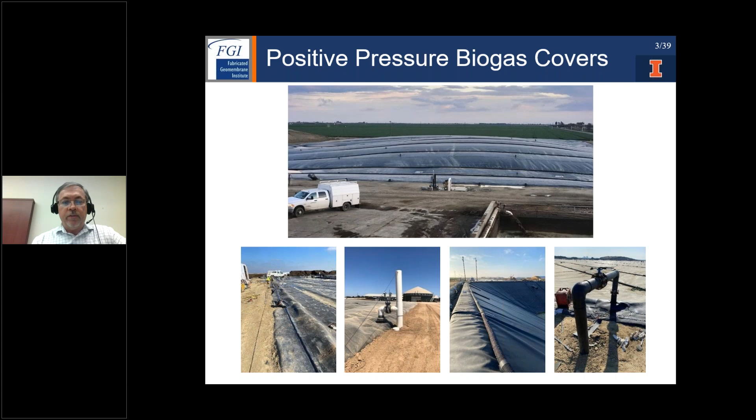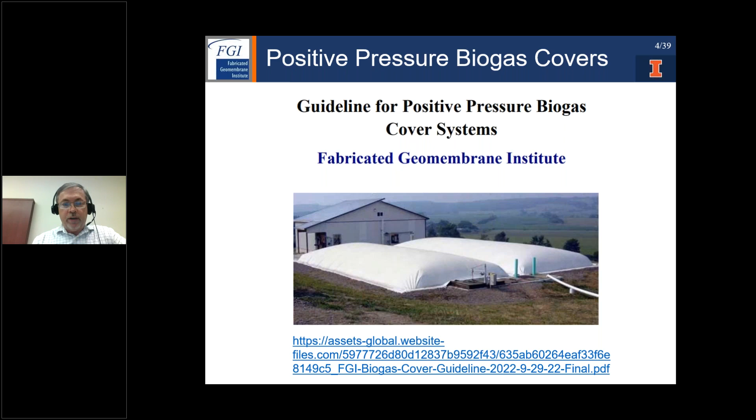Okay, well, thank you, Tim. It's a pleasure to be here today. And as mentioned, we'll be doing a presentation on positive pressure biogas covers. We'll look at the materials, the design components, and the various appurtenances and apparatus that go along with these cover systems. As mentioned, the FGI recently wrote a guideline for positive pressure biogas systems, which this webinar is based on. And this is available on the FGI website and the link below.

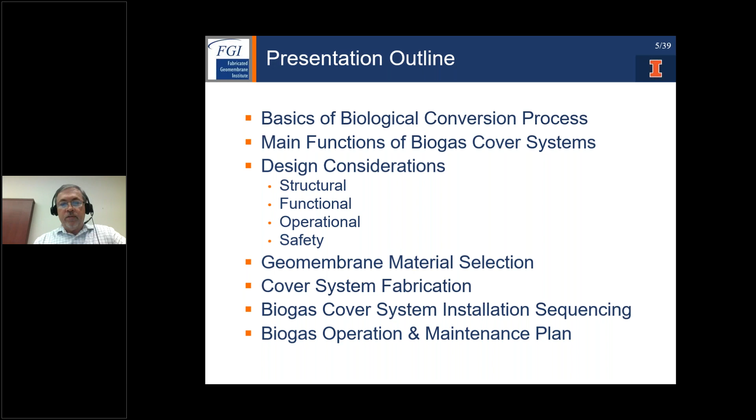So the presentation outline will cover the basics of a biological conversion process, although our expertise is not on the chemistry side, but on the geosynthetic side. And we'll look at the main functions of a biogas cover system. Steve is going to cover the design considerations, including structural, functional, operational, and safety. And then I'll cover the geomembrane material selection and testing, as well as the cover fabrication. And then we'll look at the biogas cover system installation sequencing, followed by the importance of an operation and maintenance plan for these digester covers.

So in terms of the biological conversion process, as most of us know, anaerobic digestion is the process in which microorganisms break down organic matter in the absence of oxygen, and anaerobic digestion converts organic materials to biogas. So these biogases are typically higher percentages of methane, normally 50 to 75%, followed by carbon dioxide. They can be 25 to 50%, and then smaller components of nitrogen, hydrogen, and hydrogen sulfide.

In the lagoon treatment process, we normally see most of the solids, up to 90%, separated from the liquids. These biogases generated from that point are often used for electricity, heating, generating combustible motors and gas turbines.

Often further downstream, we have additional biogas upgraders, which will further remove the carbon dioxide and the H2S, as well as some water. From there, we are producing what we refer to as biofuels or biomethanes, and these are increasingly being used for fueling in transportation.

The organic matter for most of these lagoon-based digesters is the concentrated animal feeding operations, as well as the food processing industry, not just meats but vegetables, produce, nuts, etc., and some components from municipal waste.

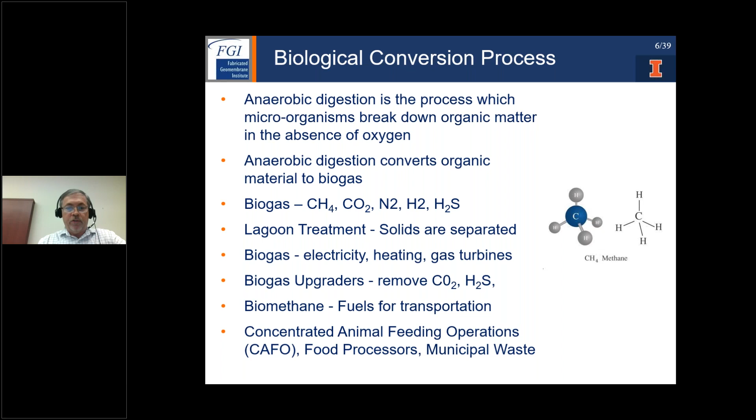So the biogas cover system, we're going to be talking about flexible geomembrane cover systems. These materials require adequate flexibility and tensile strength in combination with the ballasting and anchoring designs to withstand the internal gas pressures building up under the cover system.

Covers eliminate oxygen and enhance methane production, and this methane is collected under the cover with a perimeter gas collection pipe. Covers also help to reduce odors and the release of greenhouse gases.

The biogas covers are typically larger prefabricated panels joined on site by thermal welding, and then the whole cover system is floated into place on top of the wastewater.

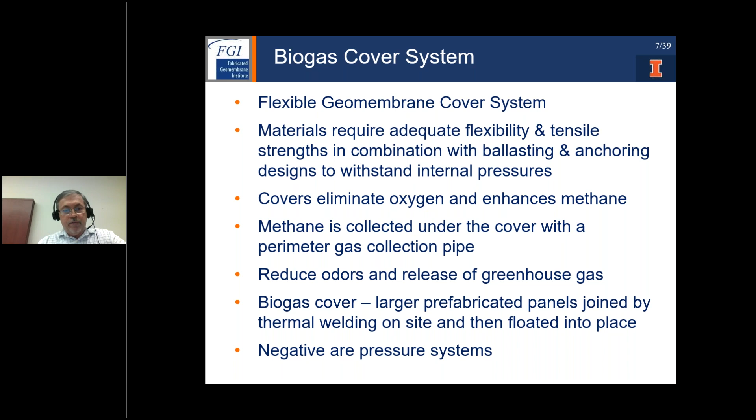And we are talking positive pressure cover systems today. We do recognize and install negative air pressure systems, which we will not be talking about.

The pictures here on the left show an example photo of the perimeter gas collection pipe and a white baffle curtain being installed. This is the actual liner system prior to the cover going on.

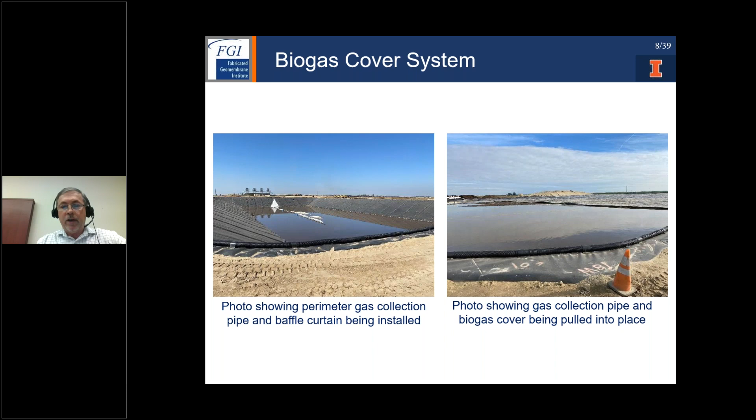Often we have baffle curtains fabricated and installed under the cover systems as serpentine paths. On the right, we're showing the gas collection pipe again, and here we see the floating biogas cover being pulled into place.

So at this point, I'm going to turn it over to Steve. Steve, you can cover the design considerations.

Thank you, Brian. So just talking a little bit about the components of a biological digester with a positive pressure cover. There are actually several more components, but we're going to focus today on the cover.

Just to mention, we normally have a base liner system to contain the liquid in the lagoon itself, and that most commonly these days would be a geomembrane, but could also be a simple clay soil liner, or in some cases these are even unlined if they're legacy systems.

We have the operational systems, which include your filling and discharge components, also your gas takeaway and venting system. And as Brian mentioned earlier, a baffle curtain is sometimes installed in order to eliminate short circuiting in the flow of liquids through the system.

A baffle curtain would typically be a flexible prefabricated geomembrane system, also with flotation on top and anchorage on the bottom. So next slide, please.

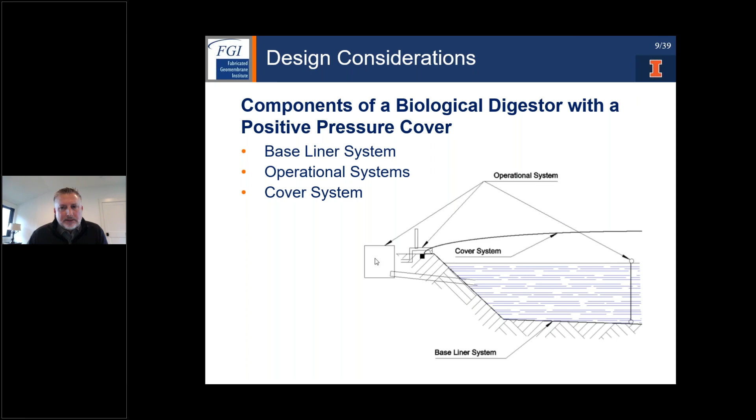Okay, so now talking about the cover system, where we're going to focus today. The primary function, Brian talked about a few others from a functional standpoint, but the primary function with regard to structure is...

...to capture the digester off gas and route it to a collection system, and of course also to prevent water infiltration and limit oxygen, things Brian already spoke about. But from a structural standpoint, that's where our main concern is.

Structural performance requirements, again, are to contain the off gas and also to resist external loads without rupture or excessive deformation of the cover system.

Design is typically proprietary in these cases and experience-based. There's not really any regulatory or industry standard for these cover systems, so you'll see a wide array of different systems out there in the field, and different performance requirements, all really established by the designer of record of the cover system.

The primary components of a cover system would include a geomembrane, perimeter anchorage, internal ballast, and then mechanical connections and penetrations connected to the cover system.

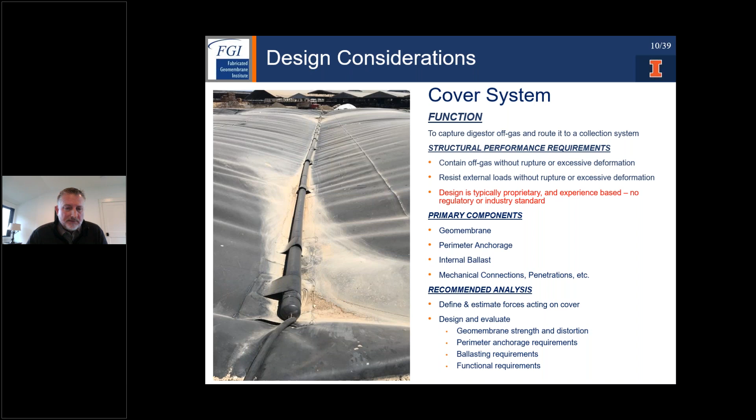Recommended analysis for the system: of course you have to define and estimate the forces acting on the cover system, and then evaluate the geomembrane strength and distortion, the perimeter anchorage requirements, ballasting requirements and ballast anchoring requirements, and then the functional requirements, meaning the seal of the system to retain that gas that it needs to.

So next slide, please, Brian. Talking about the forces: so we have dynamic and static forces, some well-defined, others not so much.

In the dynamic realm, we have the operational pressure, which is the positive pressure underneath the gas cover. This is significant, and it's typically fairly well defined in design, because the owner can specify that. The mechanical engineer involved in designing the takeaway and venting system should make sure that whatever maximum and average values are given to the designer of the cover are maintained during operation.

We also have environmental forces, including wind, water, snow, and ice. But for positive pressure covers, wind is really the only and primary concern, because it acts in the same direction as the internal forces under the cover, so we want to make sure it's an additive, destabilizing force. Water, snow, and ice landing on top actually act to stabilize the cover. We understand they're there and sometimes can take them into account, but in most cases wind is really the only and primary concern of environmental forces.

And of course you have impact and abrasion. It certainly can be significant, but it's very difficult to characterize. So in most cases impact and abrasion isn't directly analyzed or included in the analysis, but they definitely need to be accounted for, typically through material and load safety factors during the design process.

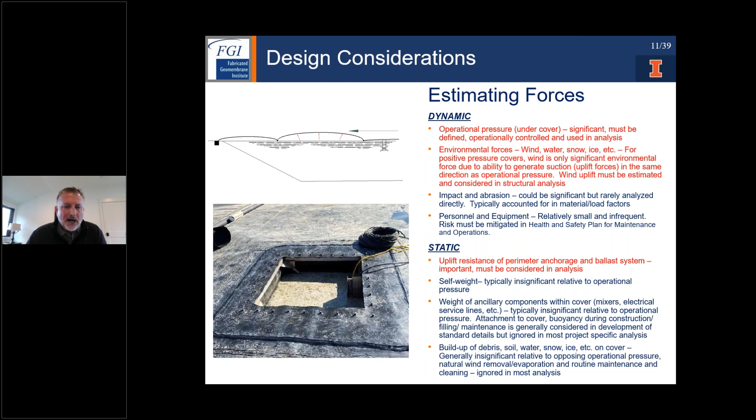And then, of course, you have the potential buildup of debris, soil, and water on top. Again, those are really more stabilizing forces, not necessarily bad for the cover - we'll talk about that in the maintenance and inspection part of this presentation. From a stability standpoint they actually add weight and form a stabilizing force, so they're not typically taken into account in analysis. They're also very difficult to characterize because you never know how much will be there.

Moving on to the forces we do need to characterize and how to estimate them. I briefly mentioned the operational pressure, typically defined by the owner or the mechanical engineer designing the takeaway system. Typical values would be right around half an inch of water column, or 0.02 pounds per square inch. It seems like a very small pressure, but it's actually about ten times the weight of the typical 80 or 60 mil geomembrane used for this type of cover system. So it's significant.

Wind uplift: again, there's no industry standard for wind uplift. The method used is really up to the designer. The first step is to determine a design wind speed, which can be defined by code, by the literature, or by the owner. Several methods are available to convert design wind speed into an uplift force. My preferred method, and probably the most commonly used in this realm, is ASCE 7, which is the standard national building code for structural loads. But you have to apply appropriate factors, since a lot of these cover systems are not located in highly populated areas.

There's a very minimal risk to humans with regard to the structural failure of a cover, so you take that into account when applying the method. You also need to modify it because ASCE 7 is really meant for buildings and things of that nature, where this is not necessarily a building but a very flexible structure. I typically would treat a cover system, a positive pressure cover system, as a dome or arched roof structure with a spring line right at the ground level, and then modify and use the ASCE 7 method from there.

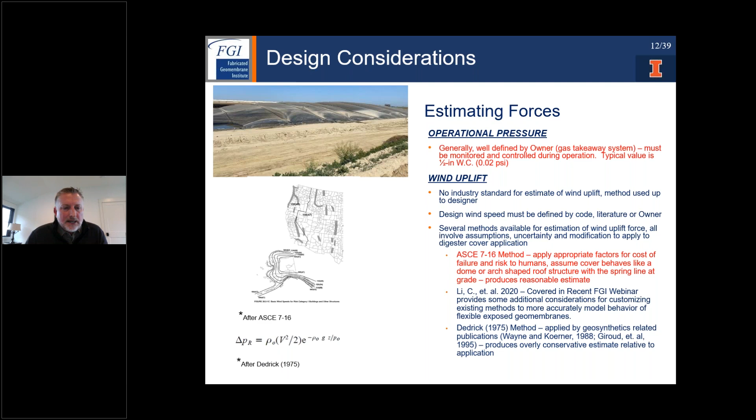We also need to estimate the uplift forces in resistance and anchorage. There are several things that provide that, but primarily the resistance to uplift is provided by the perimeter anchorage and the ballasting and ballast anchorage. We also have to look at cover self-weight, which is fairly insignificant compared to the others, but it can be taken into account as a positive and stabilizing force.

But the cover and ballast tension anchorage is much more complex and difficult to define, mainly because these geomembranes have very low modulus compared to most structural materials the structural engineer would evaluate. The stretch, along with the shape of these lagoons and the way the perimeter anchorage interacts with the ballast lines and ballast anchorage, creates a fairly complex 3D interaction and load shedding that's very difficult to model. So there's not really a standard approach there, but most people will simplify the method of estimation to a two-dimensional analysis versus three-dimensional, not considering load shedding, which makes it a fairly conservative and much simpler analysis to do.

We want to look at this because you have to determine both tension in order to determine anchorage requirements - you need to know the tension in the cover system as well as the tension in the anchored ballast system. To do that, there are really three methods primarily used here. You can look at the traditional tension cable method, which has been around for at least 100 years, looking at telecommunication cable hung from poles and things of that nature. It gives a good approximation of the stress, strain, and distortion in a unit width of geomembrane if we treat it two-dimensionally, but it doesn't explicitly take the flexibility and low modulus of the membrane into account, and therefore requires iteration to get a practical result.

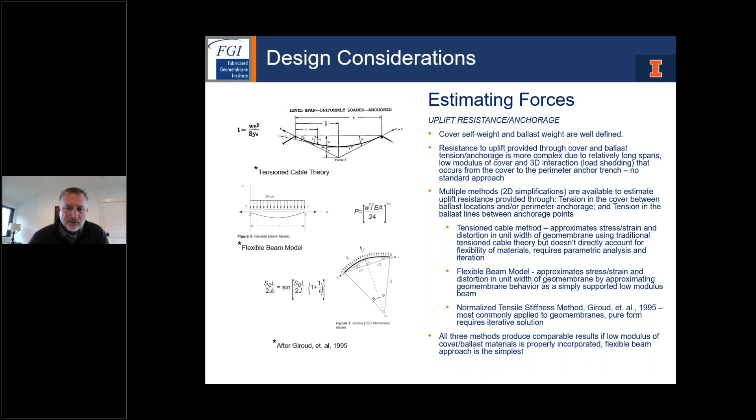Generally, the stress-strain behavior can be modeled linearly when you're below the yield point of the material, or at least in the lower strain regions, and therefore these methods all produce acceptable results and estimate tension in the geomembrane. Talking about perimeter anchorage, there are really two common methods used in this type of system.

The first would be a structural concrete ring wall. It's a very effective system, very good anchorage, but also very expensive. So it's typically confined mostly to industrial applications where they're very long term, want a long lasting cover, and aren't necessarily inclined to go a less expensive route.

It requires structural design of the wall to handle the lateral loads at the top, and also requires structural and functional seal design of the geomembrane connection to the wall. So you usually have a batten strip and gasket system along with bolts to make sure you get that seal. Other than the expense, it's a very good, very long-lasting system.

More commonly, and what you mostly see in agricultural applications, is a soil anchor trench backfilled with either soil or sometimes concrete added for weight. This system is usually designed so the liner and the cover system are both included in the same anchor trench. But the cover system produces significantly more tension due to operational pressures and wind load than the liner system, so that's where we typically have to design the trench sizing to accommodate the cover system.

Since the load due to wind is highly uncertain, best practice is to design that anchor trench to hold up to the yield strength of the geomembrane cover system, not necessarily the estimated tension in that cover system. Of course you design the system itself at a tension lower than the yield strength, but we want the anchor trench to accommodate the entire yield strength just in case there's an abnormal event. You don't want to dislodge the cover from that anchor trench, because then you risk damaging the liner system as well and having a liquid release, which would obviously not be recommended.

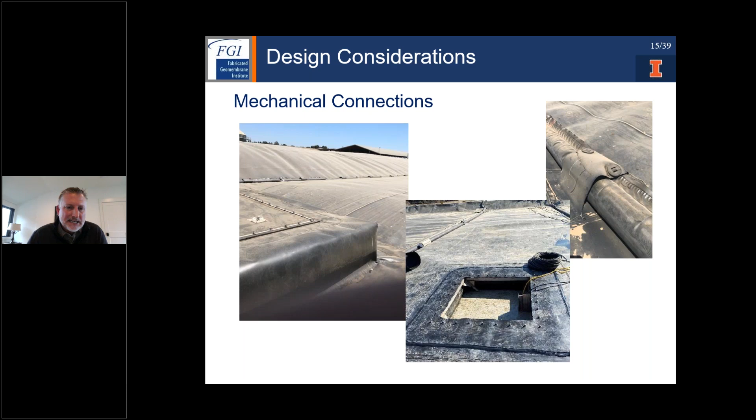Talking a little bit about mechanical connections—there are many access hatches, mixing hatches, and welds of the ballast system to the cover. You want to make sure that the tension being carried by that cover can also be carried by any mechanical connections to the cover. Otherwise, you can have an issue with localized stresses being higher in these regions around these mechanical connections, so you just want to take that into account in the analysis of the cover system.

Also, from a functional standpoint, you've got many penetrations of these cover systems, and you want to make sure the seals are adequate. For pipe-type penetrations, as the outer two photos show, simple booting systems and welding will usually do the trick, but it needs to be flexible enough. Remember, these covers are very prone to movement under wind and operational pressure, so whatever booting system is used needs to be flexible enough to accommodate that movement.

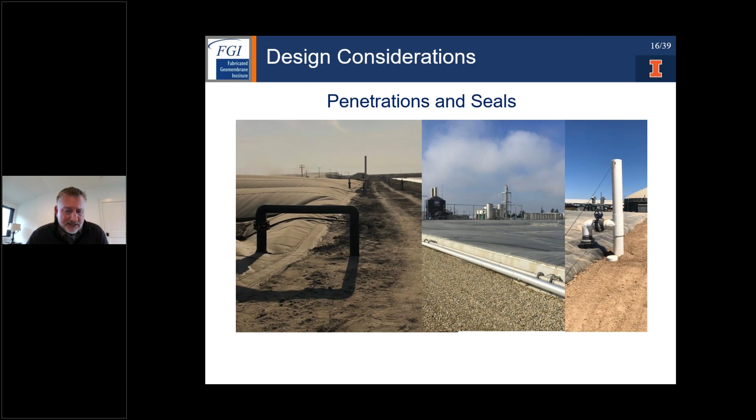And then, obviously, at the anchor trench or anchor wall, there needs to be a connection that's leak proof. The soil anchor trenches typically seal themselves with the soil, but a concrete wall will require a gasket and a batten-type seal system to make sure that you're not leaking the gas.

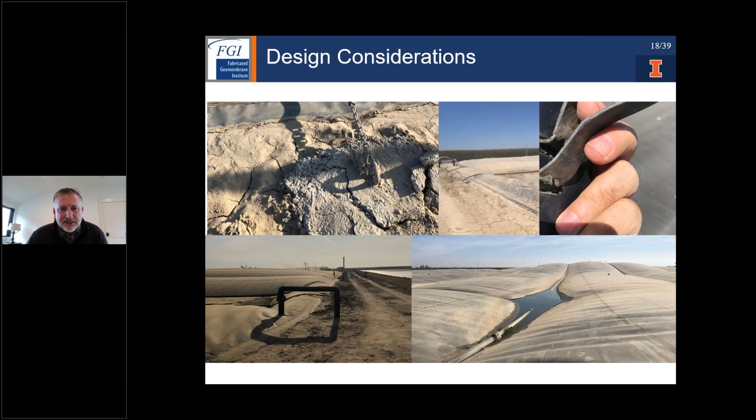Recommendations for ballasting: first, you have to take into account construction cost versus the risk and expense of failure. Grid ballasting is the better system with a concrete ring wall, but of course, not always practical. If you're doing perpendicular ballasting, you want to make sure the layout geometry is long and narrow versus square or regular—that allows you to limit the span length on the ballast line.

Create uniform cover spans where you can. That's also better to avoid horizontal stresses in the cover. Minimize the ballast line spacing to reduce cover span between the lines. And again, that reduces stress. Add internal weights if possible to add ballast and additional counteracting forces. And also allowing installation slack in those ballast anchorage lines will reduce the tension in them.

So just like any cable, the more sag in the cable, the less tension. And so you can do the same thing with the ballast lines as long as it's within the parameters that you want to allow that cover to expand.

Design the cover to temporarily carry the entire design load, even without the ballasting system. So you can reduce your factors of safety, but if you design the entire cover system to be below yield tension under the entire design load, then if your ballast lines do fail or get dislodged, it's a simple repair versus replacing the entire cover.

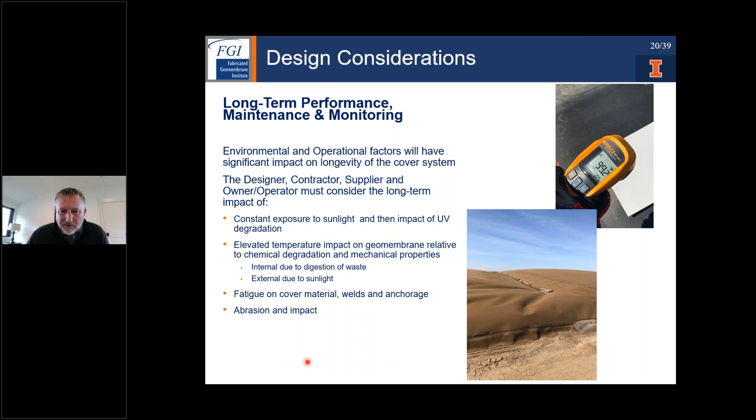We need to constantly do inspection for small fatigue cracking, things of that nature that might occur, and make sure those get repaired before they become major issues. And then finally, of course, abrasion and impact can also cause small pinholes and other things that need to be repaired before they become a big issue. Next.

Last but not least, safety is always very important. Anytime you're working around these covers, you're dealing with a huge volume of flammable gas. And so that needs to be taken into account with project-specific safety plans, training for personnel, and specific to fire prevention. Personnel working on these sites should have fire retardant clothing, use non-sparking equipment, make sure they have ground fault interrupted equipment, and certainly no smoking anywhere near any of these covers.

And then obviously need to have good fire protection or fire suppression equipment readily available to extinguish any fires before they become a major issue. So with that, I've covered all of my portion of the presentation, and I'll turn it back over to Brian to continue.

Okay, thank you, Steve. And we always appreciate your firsthand expertise. You've worked with us on a number of structural and civil designs, and have a lot of expertise.

Moving on to the geomembrane material selection, the most common materials that we're seeing in these fabricated geomembrane digesters are linear low density polyethylene. We're seeing PVC, both unsupported or unreinforced and reinforced. We're seeing reinforced polyethylenes. We've seen EPDM rubber, and we do see some HDPE being used as well, although they are quite stiff semi-crystalline materials with very low tensile yields. So we have to go very thick with those materials.

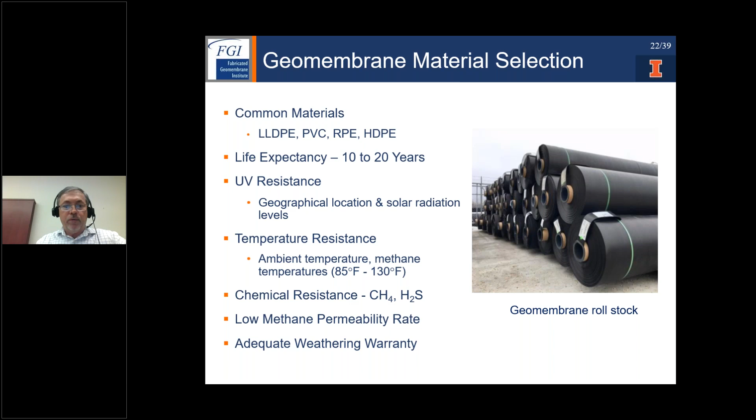And as well, you should make sure you have a membrane that has a very low permeability rate or vapor transmission rate, and that the manufacturer is providing adequate long-term weathering warranties.

So the FGI, when we wrote our guideline last year, we definitely looked at some UV testing. We looked at a once-in-lifetime formulation, geomembrane formulation test, and accelerated UV exposure for 10,000 hours, which we then inspect the surface for cracking and surface degradation, as well as we look at tensile strengths retained, and we're recommending a minimum of 80%.

We also looked at elevated temperature resistance. We looked at the oven aging testing at 85 degrees Celsius or 185 degrees Fahrenheit for 90 days. And then again, we would at that point look for any surface cracking and surface degradation, and as well looked at the retained tensile strengths of 80% minimum.

The chemical resistance, we do note again that we need good resistance to methane and resistance to hydrogen sulfide. At that point, we had not listed the test methods, but the next slide will talk about that. And finally, we do note a methane gas permeability to a maximum of 1,000 milliliters per meter squared per day. And many of our geomembranes can be well under that.

Recently, in the last year, the Geosynthetic Institute out of Philadelphia has been working on a new test method for positive pressure geomembranes, and the method established and now officially in place is method GM35, and it's using a QUV accelerated weatherometer, but in combination testing with pressure.

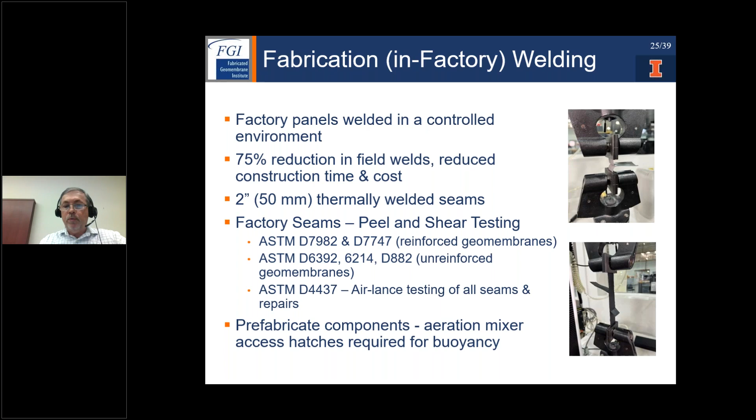We typically are using a 2-inch factory seam, similar to what we use in the field, a thermally welded seam. And all of our factory seams are tested in peel and shear in accordance with the appropriate ASTM test method, whether we're fabricating a reinforced or unreinforced material. And as well, we try to prefabricate as many of the surface cover components as possible, including things such as the aeration mixer and access hatches, which really do require positive buoyancy, as Steve pointed out.

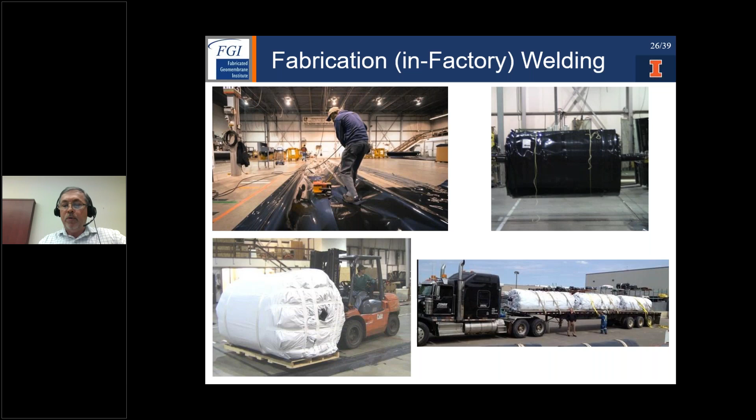The in-plant fabrication, as you can see, just a couple pictures of some of our plants, but in the picture on the top left, we're welding in ideal conditions, so room temperature, clean floors, tensiometers, inline testing with the fabrication. And then these are wound up onto larger panels. We can typically, for these digesters, make panels, depending on the material weight and thickness, anywhere between 20 and 30,000 square feet. And then these large panels, as you can see in the bottom pictures, are put on trucks and transported to site.

So in terms of the sequencing of the cover installation, we follow a couple of broad steps. First and foremost, working with prefabricated panels, we need to have an appropriate work area or laydown area on one end of the lagoon. This is where we do our staging, unrolling, welding, and deployment of the prefabricated panels. And we need a dry, well-compacted area with adequate space.

Second, we need good weather conditions. We really have to make sure we have a low wind day or a couple days when we're pulling these covers over. And of course, we don't want to see a lot of rain or moisture while we're installing these.

And then we have to fabricate a special reinforced leading edge. That's our main edge that we're pulling the cover into place over the wastewater pond. With that leading edge, we need proper pulling equipment, right-sized trucks or backhoes, and heavy-duty ropes evenly spaced across the leading edge. And from there, larger projects often require multiple fabricated panels that need to be welded together on site sequentially and then floated into place one by one or section by section.

As soon as we have the cover pulled over, the materials need to be properly adjusted, distributed properly into the anchor trench and properly backfilled. And once we have the cover system in place and backfilled, that's when we have to start the ballasting, whether we're using webbing or strapping system or the weight systems that Steve was showing.

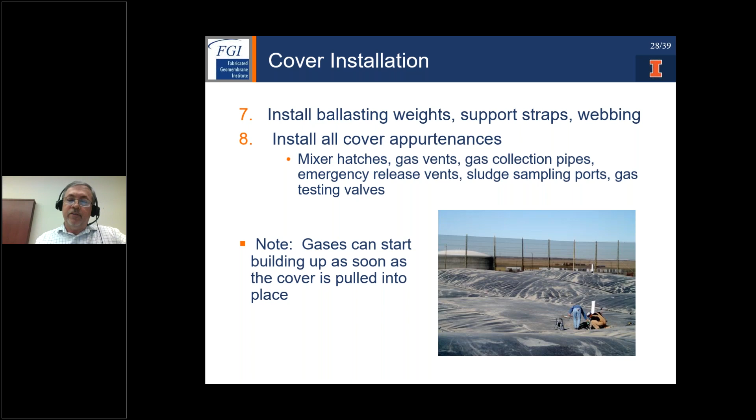And note, often, once we have the cover system backfilled and we're starting to do the ballasting and venting, we actually are already seeing gases build up, as we see on the picture on the right. We're putting in some burping vents, and in this installation we already have gases building up, so it can be challenging.

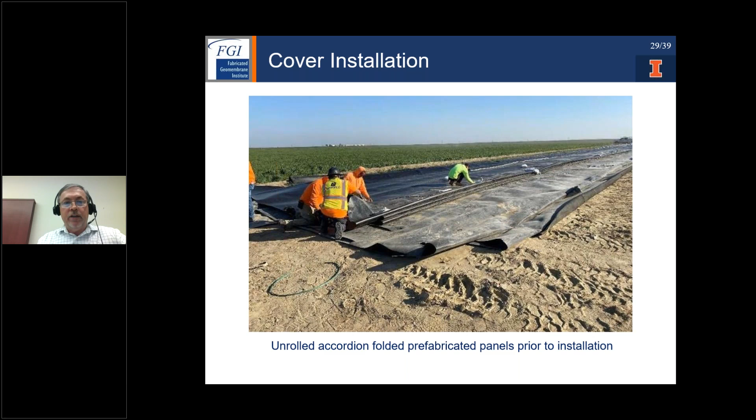We have a good video of this. Actually, we'll run it, about a 220,000 square foot cover system in the Central Valley region of California. We did this job in, I think, 2019 or 2020. And here you can see our trucks and the ropes. They're on both ends, plus on the far right, we are pulling in the center with long ropes to the edge.

So the superintendent says everything is safe, all good. Let's start slowly pulling the cover into place. And if you look closely, you can start to see this cover nicely tensioned, being pulled into place. We have a low wind event. This is a fairly large facility, again, about 220,000 square foot.

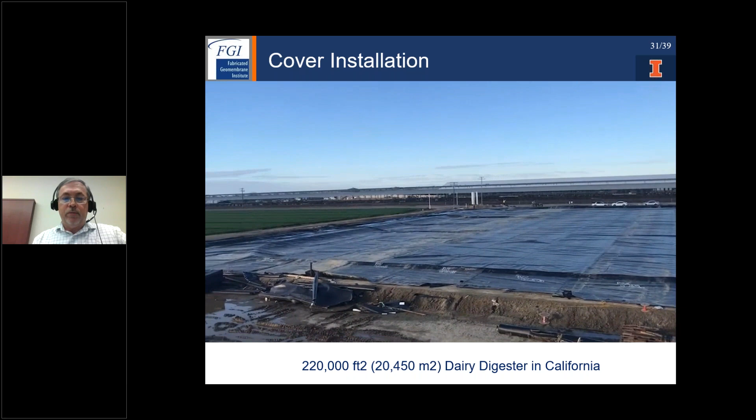And we have 4 pieces of equipment slowly pulling that into place and pulling it right over top of the wastewater. And as soon as that's in place, we immediately will do the backfilling, the anchor trench backfilling.

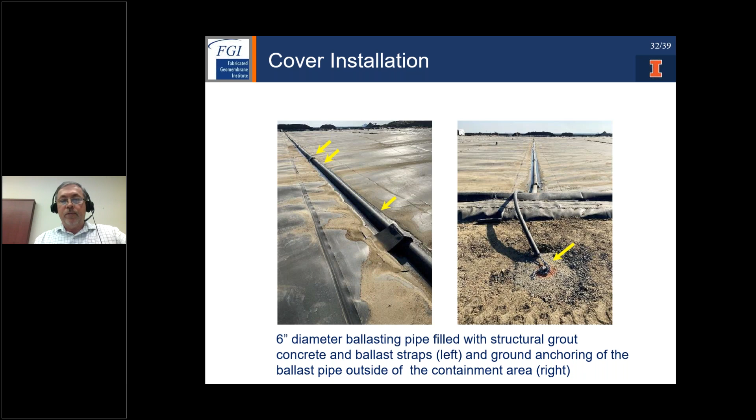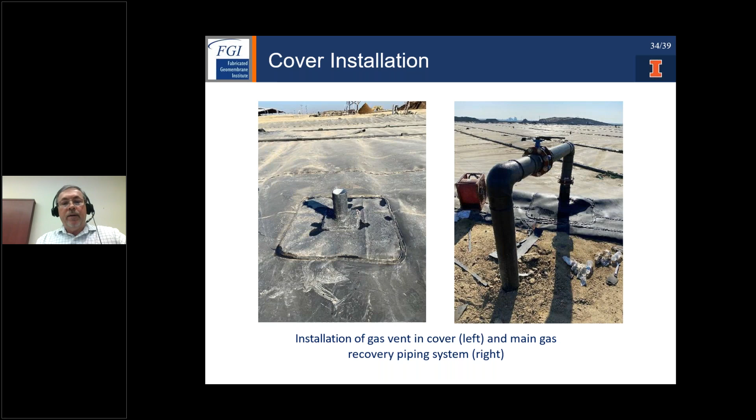Also, all the installation of gas vents or main gas recovery. Anything penetrating the cover system needs to be properly sealed and mechanically attached, making sure that it's both air and gas tight.

So as Steve mentioned, the operations and maintenance plan for these covers is very, very important. The biogas covers are constantly moving, ballooning, billowing, and exposed to UV, wind, rain, snow, temperature variances causing thermal expansion and contraction, and all of that can accelerate the wear.

So we recommend an annual inspection and maintenance be performed on these cover systems by a qualified geomembrane inspection company that will properly document and record all visual observations, inspect for punctures, tears, cracks, seams, and repairs. This includes all the surface cover appurtenances, the total surface area, inspecting the anchor trench, the ballasting system, and certainly any repairs performed need to be properly tested and fully documented.

And of note, the FGI recently wrote a very good guideline on operations and maintenance for geosynthetic lined reservoirs, lined water reservoirs, very applicable to these digesters as well in terms of best practices and procedures.

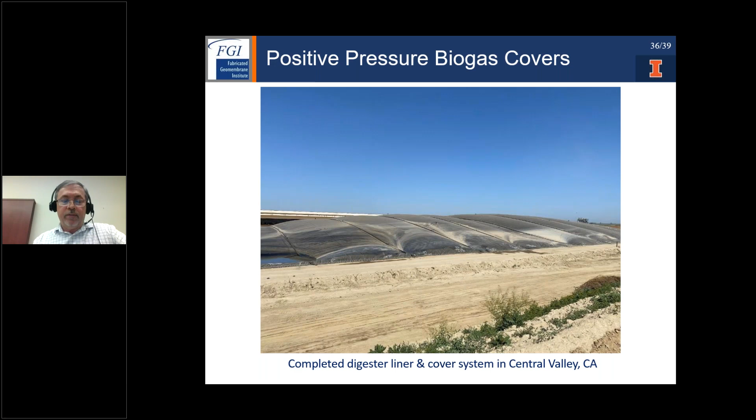In North America and around the world. Another good example in the food processing industry, this is a company that manufactures figs just outside of Fresno, California. This is a custom sized and configured biogas cover that we fabricated using a reinforced PVC material a number of years ago.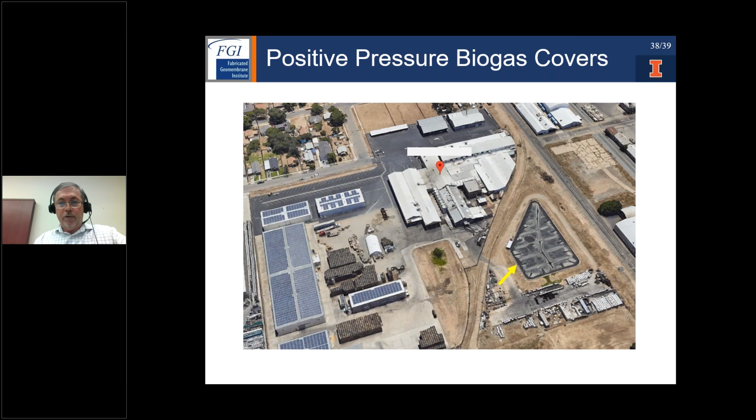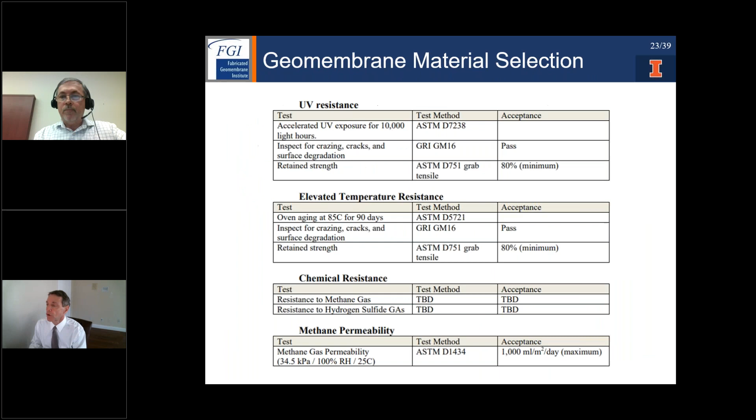Great, Brian, thanks. We've got a bunch of questions. First, Brian, can you go to slide 10? And I'm going to ask you a question while you get there: have earth anchors been used to secure the cover system?

I'll default that over to Steve. Could you repeat the question, Tim? Have earth anchors been used to secure the cover system? Not that I'm aware of. I can't say for certain that they haven't. None that I've been involved in, but they certainly could be used in that application. We'd have to estimate the tension involved and then design the earth anchor for that, but it certainly could be used, especially for the ballasting line. I think it'd be a good application for it. Most commonly, at least in the ones I've been involved with, it tends to be concrete column anchors.

Okay, thank you. Slide 10, Brian and Steve. It looked like two wires going into the end cap in the foreground. What are they? And is the larger 4-inch black pipe in the middle acting to hold the cover down and receive the siphon off the methane?

The two wires are actually the link of a chain that's embedded in the grout. There's grout inside of that 4-inch pipe you see there. So the pipe is HDPE filled with grout to provide weight — purely weight, nothing to do with the methane system. The link you're seeing is the chain embedded in that grout to structurally connect it to the anchor system, which is out of view in that photo. So it doesn't move. Right.

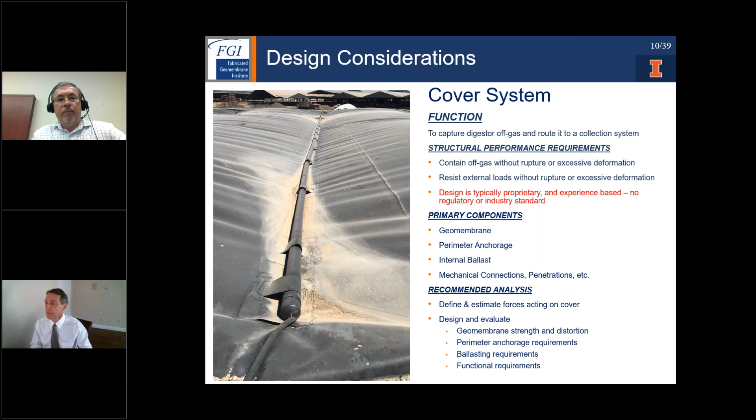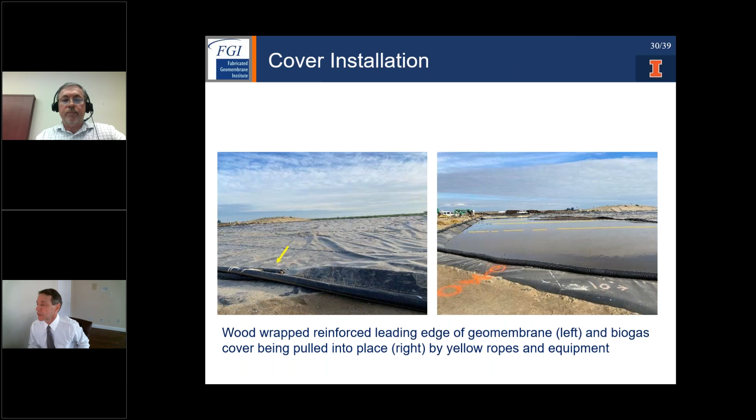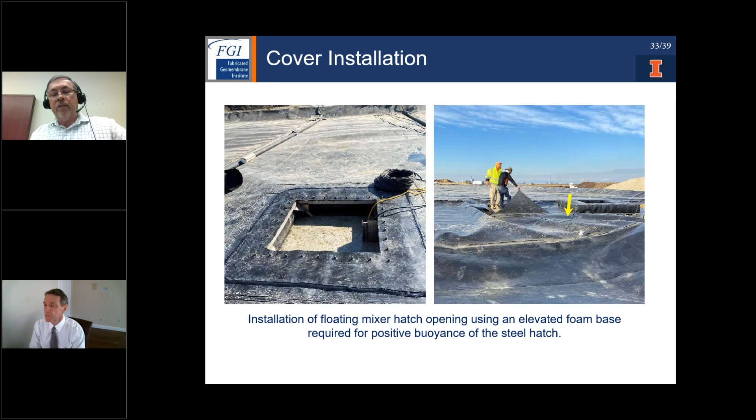Okay, next question: in Canada, would you have to meet CSA B149.6 in the design and undergo an inspection by the TSSA? Tim, I would have to check on that. We have done some digesters in Canada, the pictures in this presentation actually were from Canada. I don't believe to this point we've had to, but let me work with our construction group and see if that's a regulation we're currently complying with. I don't know the answer to that right now. Okay, we'll get back to you on that question.

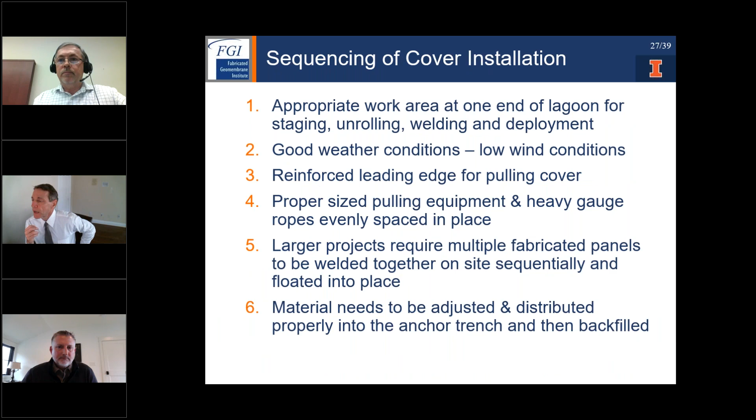While I ask another question, Brian, can you go to slide 24? Next question: is there a possibility that different whale sizes are a result of inconsistent material properties versus, say, differences in gas pressure?

Brian, do you want to handle it? In my opinion, no — our materials are very, very consistent. We do see, for instance in some of the colder regions like Minnesota, some northern states, and Canada, hot and cold areas meaning more aggressive gas buildup in certain spots. I even see that in some of the stuff we're doing in Arizona and California. So for whatever reason, we see hotter spots with more aggressive gas buildup, and that's why we don't necessarily see consistent positive inflation in all areas. I'd add that the material, from a stress-strain and modulus standpoint, is very consistent, almost perfectly consistent.

I think a lot of the differences you see also could relate to, as I mentioned, if the material had been overstressed or stressed beyond the yield point at some point in its lifetime in a particular area, it could actually stretch more in that area or have permanent deformation.

But more likely and more commonly, these ballast lines are welded to the cover in places, but they can move around a little bit. So if the ballast line moved or there was inconsistent spacing during construction, you can see changes in the size and how the cover or these whales blow up.

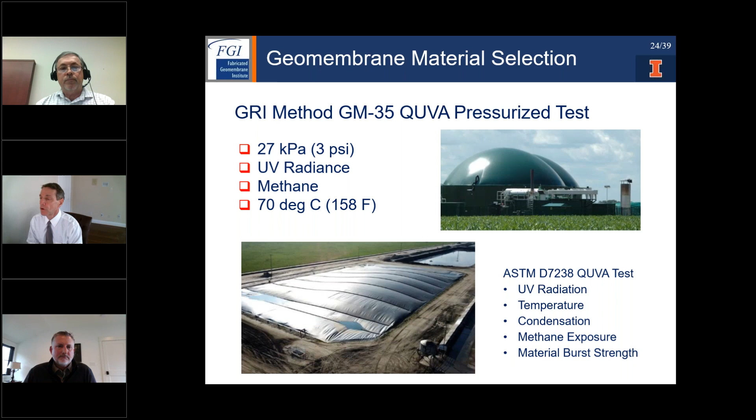An attendee recommends adding hydrogen sulfide as a safety concern. Earlier we were talking about safety concerns, so that might be a good one to add, hydrogen sulfide.

Okay, next: do you recommend welding the cover geomembrane to the bottom geomembrane, or should they be separate in the anchor trench? Do you want to answer that, Brian?

Well, I'll say we see it both ways. Certainly if we are welding the cover to the liner, that's a very critical weld. Normally we have to do 2 or 3 extrusion welds, with special additional capping. So it's done commonly.

Also commonly, we can see it in an existing, a common, or even a separate anchor trench. Of course, the cover trenching is very, very important, as Steve was saying. We need a deep, well-compacted trench. We need it to be basically gas tight. And a lot of times, in addition to just backfilling with earth, we're putting in grout and structural grout, et cetera, to help reinforce and give us the type of compaction we need. So it's done multiple ways, or both ways.

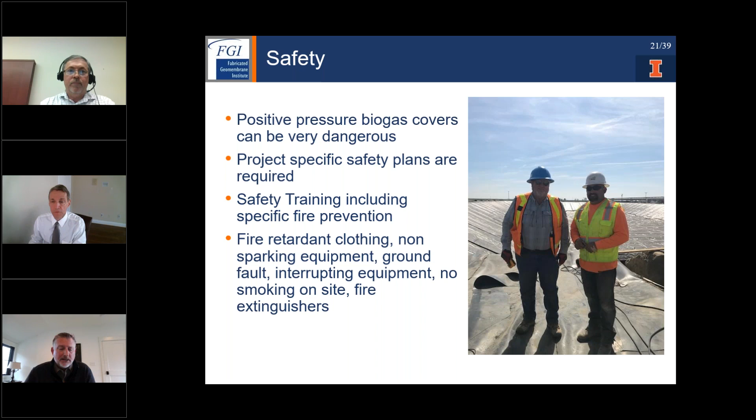On the other hand, if you want to control the shape of the structure, or the membrane itself is not strong enough to avoid yield under the loads, then of course you would need to add ballast to make sure that it performs as it's intended to.

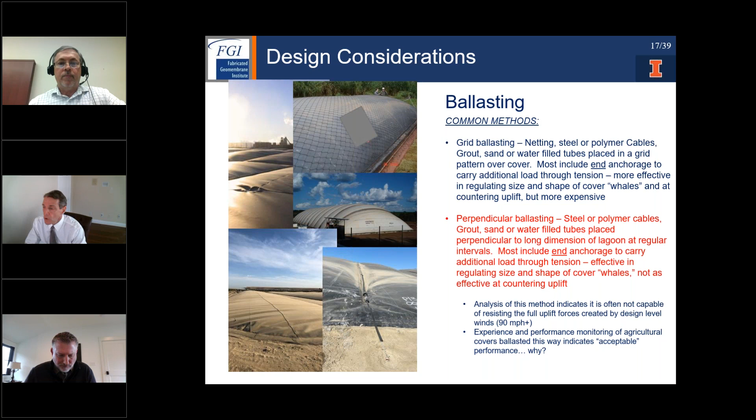Have there been any major disasters such as fires or explosions with these facilities? Is lightning or static electricity considered?

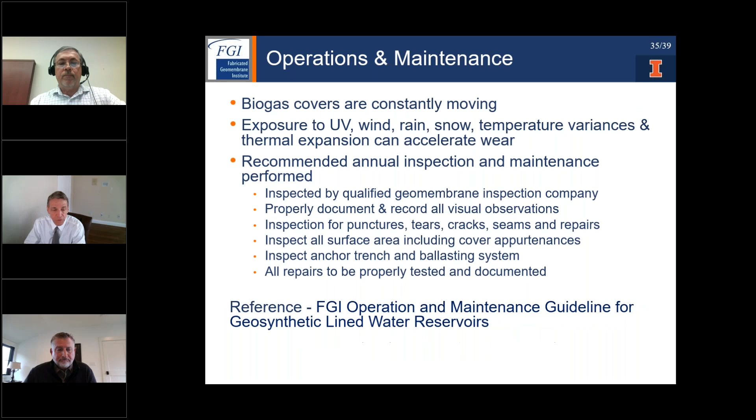To that point, within Layfield we're not familiar with any. We've heard rumors, or we understand there may be some. Obviously working with methane, there's that combustible risk, but the way we address it with safety, et cetera, we've never experienced, nor do we know firsthand of any major failures.

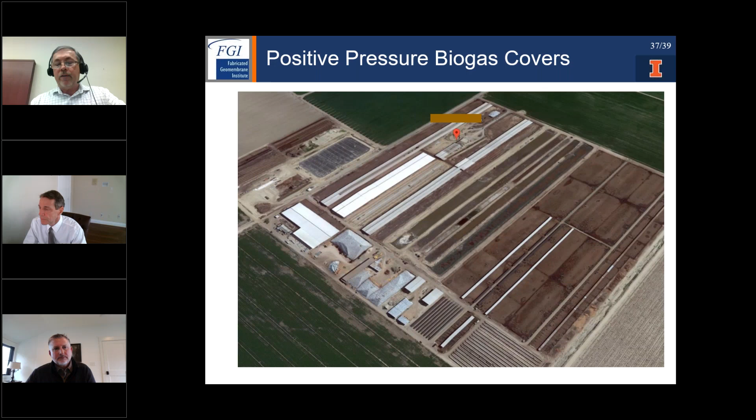In terms of grounding for lightning, I don't believe that's factored into typical designs at this point—not in our designs anyway. But I'm sure the mechanical people designing the takeaway systems are certainly providing lightning and static electricity protection to anything in contact with the combustible. I'm a civil engineer and Brian works mostly on the civil side, so we don't necessarily get into the takeaway systems or static electricity protection. I can't necessarily say they're not designed for that—it's just not within the area we typically work on for these structures.

Yeah, typically we have a perimeter gas pipe. We bring the gas to a central point. We may have some basic scrubbing capability there, but downstream from that point, the whole mechanical system is in that design. I'm sure they do have proper lightning protection, etc.